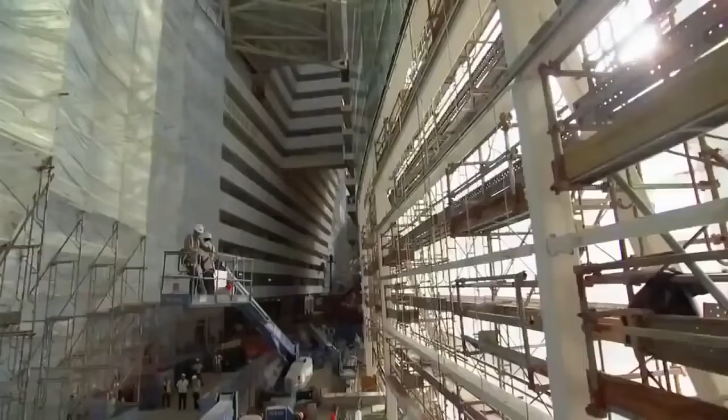Incredible feats of architecture. And right now, I'm going to take you behind the scenes of one of the largest construction projects in all of Asia. Singapore is reinventing itself. This small island nation is attempting to finish one of the most audacious buildings on the planet. It's the country's first casino, 3 skyscrapers covering 9 million square feet, and topped off by an engineering masterpiece, the first ever Skypark. Longer than 3 football fields, with gardens, swimming pools, and restaurants, all higher than the Seattle

Space Needle. We're actually in the pool right now. We're in the pool. This is the view from the pool. Wow. It's pretty spectacular. That is amazing. To finish it, crews must perform some of the highest and heaviest lifts ever attempted. I mean, you're putting a piece of steelwork the size of an aircraft carrier on top of 3 towers.

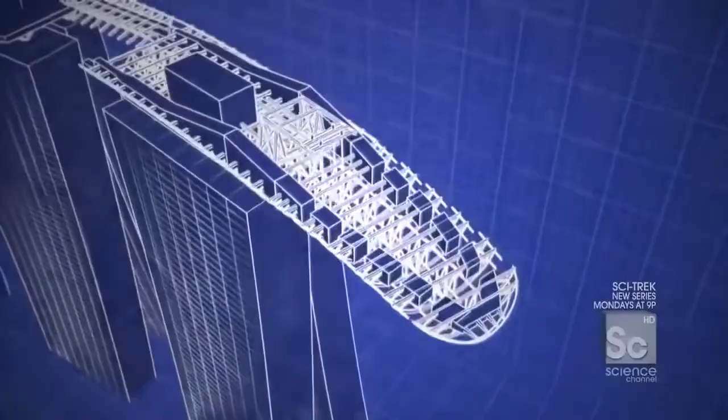Tackle one of the largest paint jobs on the planet. You would never do this in America. And erect one of the longest cantilevers in the world. 200 feet out over nothing. Oh my God, that's enormous.

I am in Singapore, a tiny island nation with less than 5 million residents. In fact, the entire country is smaller than all of New York City. Located at the southern tip of the Malay Peninsula in Southeast Asia, the main island of Singapore is both a city and a country, one of the most densely populated in the world.

Culturally speaking, it's a somewhat strict and buttoned-up environment. Chewing gum, against the law. Insensitive behavior is punishable by fine. And if you're caught vandalizing a building, you quite literally get hit with a stick. But despite this conservative cultural backdrop, Singapore is attempting to reinvent its image by doing something totally surprising. They're going to open a massive casino.

With no natural resources of its own, Singapore is risking $5.5 billion in hopes of cashing in on the gambling boom exploding across Asia. It's a pretty significant gamble because for Singapore, you've never had gaming before at this scale. You've never had a resort at this scale. Yes. You're taking a kind of a major leap. Yes, it's certainly a transformational project for Singapore. Where you hope to actually not just double, but triple the tourism receipts. That's big.

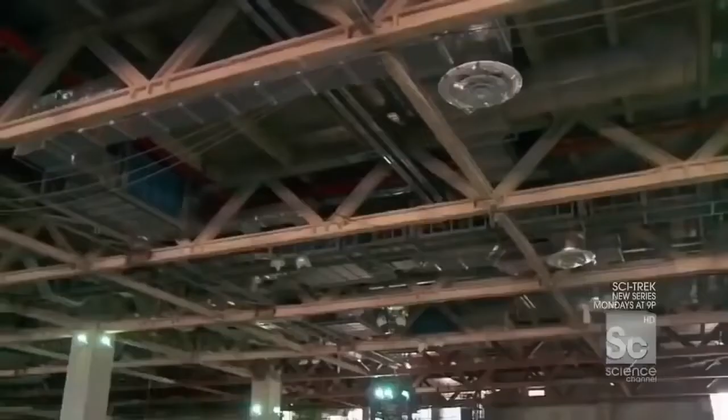The centerpiece of this giant transformation, the Marina Bay Sands. One of the biggest and most expensive casino complexes in the world. Unlike any hotel and casino ever built. Rather than just being kind of a traditional hotel and casino that we might find in Vegas, instead, we have a museum, you have theaters, you have retail, you have a casino, massive convention center, 3 incredible hotels, and all of that capped by the first ever Skypark. That is absolutely right. The Skypark on the very top will become the icon of Singapore, we think.

In a move that has never been done before, world-famous architect Moshe Safdie put a park across the top of 3 massive skyscrapers. An 1,100-foot-long urban oasis with tropical gardens and one of the longest swimming pools on Earth. All of it perched 55 stories above the ground.

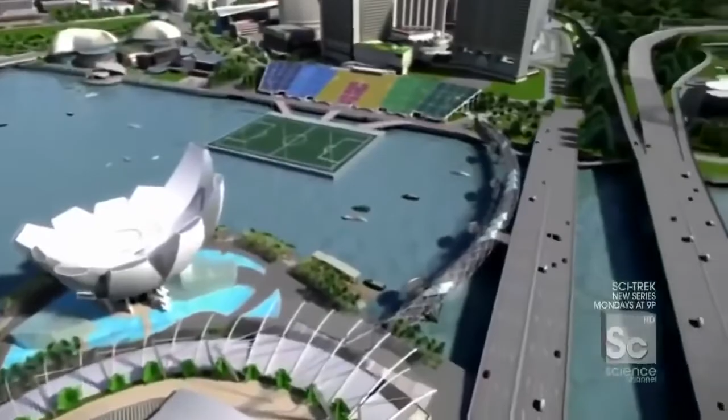So, Brendan, how do you describe a Skypark to people? I mean, it's just a fantastic structure. I've never seen anything like it. There's 3 55-story towers, and you're putting a piece of steelwork the size of an aircraft carrier on top of it. So it's quite a feat. And there's a park up there. There is. Well, there's more than that. There's observation decks and swimming pools and restaurants and all sorts of things. So it'll be a little city in itself.

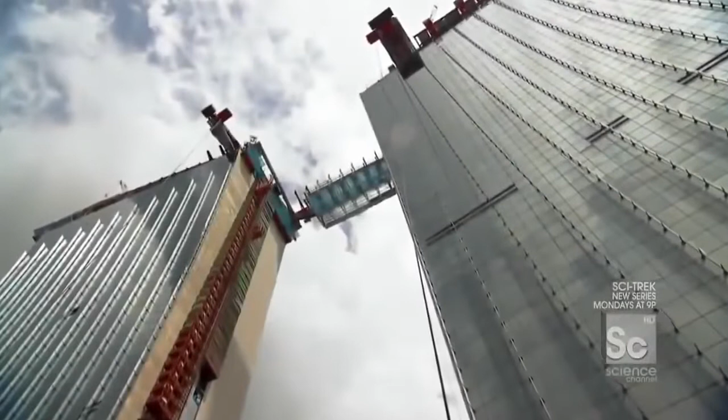The biggest challenge for builders, lifting 7,000 tons of steel, which is more than the main span of the Brooklyn Bridge, on top of 3 650-foot-tall buildings. To get it up there, the team divided the structure into 14 large but more manageable segments. 6 form the bridges connecting the towers, and the other 8 make up the observation deck, which sticks out 218 feet from the end. And right now, crews are about to lift the second-to-last bridge segment, a massive 350-ton piece that will hang between towers 2 and 3.

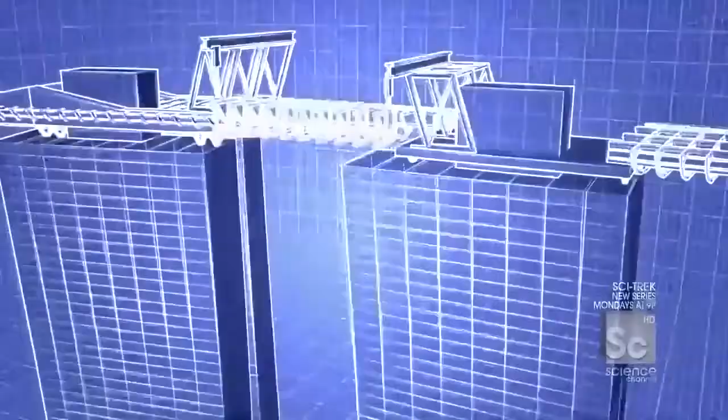It's a little after 7 p.m., and on most job sites, it'd be quitting time, right? Folks would be going home. But here in Singapore, we're about to begin one of the most critical lifts in the entire project. That bridge segment right there, an over 350-ton chunk of steel, is about to get lifted up over 650 feet in the air.

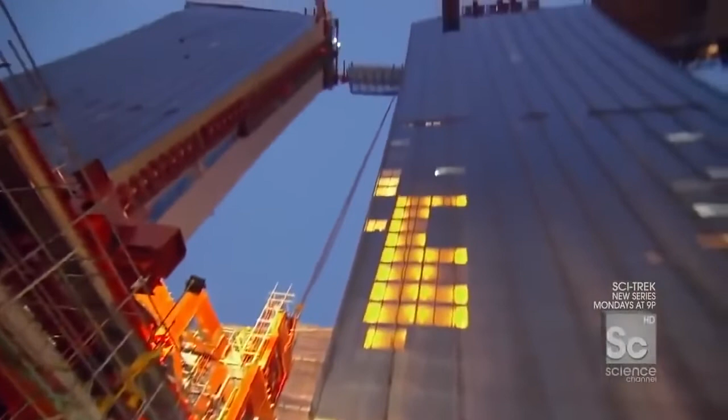I mean, in principle, this sounds crazy, right? Yes. We're actually taking a bridge, lifting it up, and putting it on top of 2 skyscrapers. This has never been done. Never done. So you've got to be a little bit nervous to get this thing up. Oh, definitely. We have to get it right.

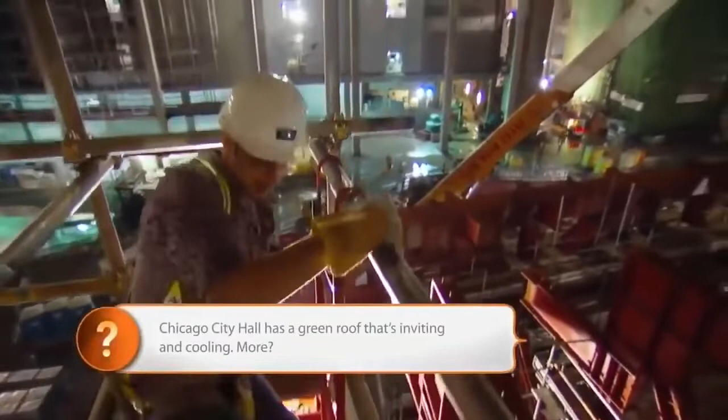Lifting this piece will take some of the strongest hoisting cables ever designed. Going up? All right, Solomon, up here? Yep. They get attached to the very top of the segment, 5 stories up. And now, at long last, I'm on the top of the whole bridge segment, and you really get a sense of its length, because look at that. It spans all the way out between 2 full towers, over 150 feet long.

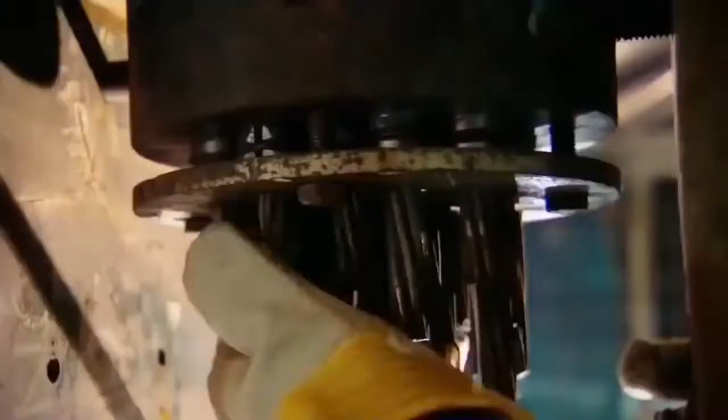And here, this is what it's all about. This is the shackle coming down from over 600 feet up. And to really get that point, come here, check this out. Look at the amount of bound cables inside of this thing. Just the density. It's 2 of these shackles, one on this side, one on that side. We're gonna lift up over 350 tons of steel.

All right, you call the man upstairs? An operator from the top of the Skypark lowers the shackle down. There she comes, here it is. Okay, 960 mm. It has to line up within 1/10 of an inch for this 150-pound anchor pin to fit through. Oh no. Stuck. Push. Come on, shake it a little bit. Hammer! Give it to me. You ready? Here I come.

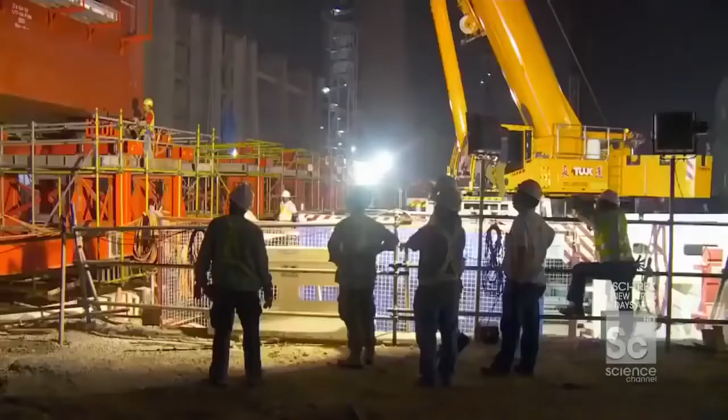Once the pins are pounded into place and the shackles are connected, there is one final step to make sure that the load is secure. Woo! Overnight, crews test the connections for 12 hours by hanging this segment just 4 inches above the support. If everything looks good, it is ready to go up. Okay, Solomon, she's floating. Yes. 4 inches off the ground. Ready for the lift? Yes.

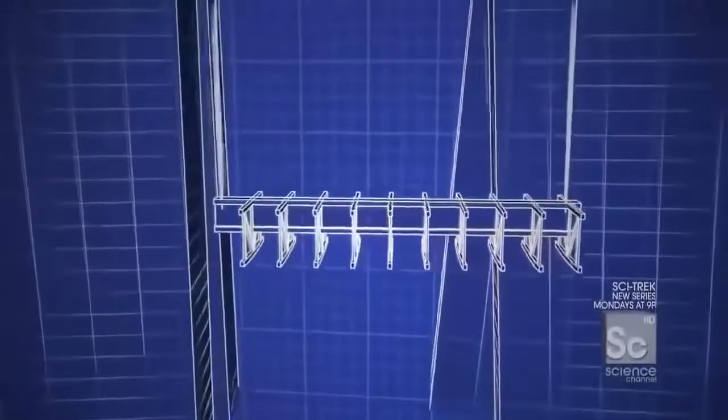How's the wind? If you can see it, it is swinging. And if it swings, it might hit the building. So when the lift begins, the concern is in a strong wind, like a pendulum, it could move and actually hit the building. Yes. It's that close to the building? It is very close to the building. Because of the curvature of the towers, this piece must pass within 10 feet of 2 glass skyscrapers on its way up. Any wind over 5 miles per hour is enough to call off the lift. So are we good? Are we ready? Yeah, good. So it's now okay to go.

Typically, crews would use tower cranes for heavy lifts, but this segment far exceeds their capacity. So instead, engineers are borrowing the technology from a different kind of construction, bridge building. Even the most powerful tower crane can lift about 20 tons. This thing weighs over 360, not an option. So they went with something called a strand jack. And to understand how it works, imagine 2 hands or clamps holding a rope. One hand locks the rope, the other brings the rope up, grabs the rope, goes back for more, brings up more rope, and so on and so forth.

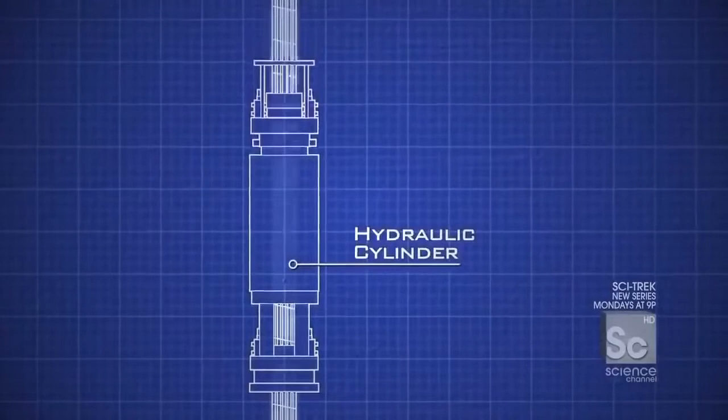Strand jacks work on simple hydraulics. A bundle of 22 half-inch diameter cables passes through 2 clamps. The top clamp grips the strands and moves up almost 2 feet. Then, the bottom clamp locks the cables in place while the top moves back down for the next pull-up. It takes 2 enormous strand jacks to lift this segment, one on each tower. Combined, they could lift the Statue of Liberty. It's the first time that this technology has been used to make lifts this heavy from the top of a skyscraper.

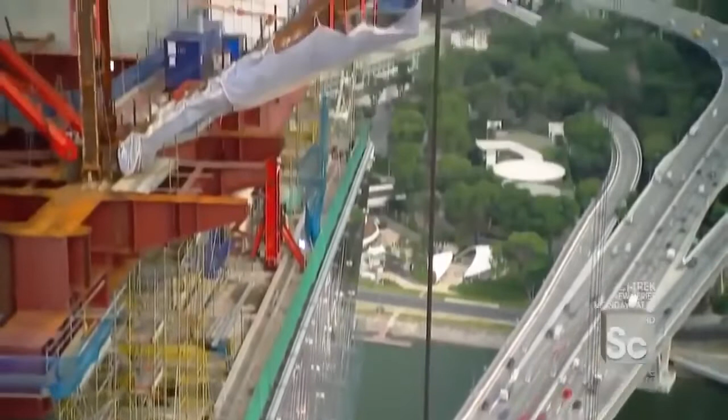Tony? Danny. Welcome, Danny. Good to meet you. Good to meet you.

Tony, where am I standing right now? Well, you're on the Skypark. So this is kind of where the action is. This is where the pool is. Yep. Right where we are now is the second swimming pool. We're actually in the pool right now. This is the view from the pool. Oh my God. People will be able to swim out to the edge of the pool. And literally there'll be no edge, right? It'll be an infinity edge looking out over Singapore. Wow. It's pretty spectacular. That is amazing.

And what's making all of this happen is this really nasty looking beam. That's right. So this enormous frame is supporting the strand jacking units. Now, can we actually head up top to the strand jack? Yeah, we can. Let's go this way. The strand jack sits on a temporary support structure that extends 30 feet out from the side of the tower. So, Tony, where we're walking right now, we're actually leaving the skyscraper below us and now heading out. We've just walked off the edge of the building.

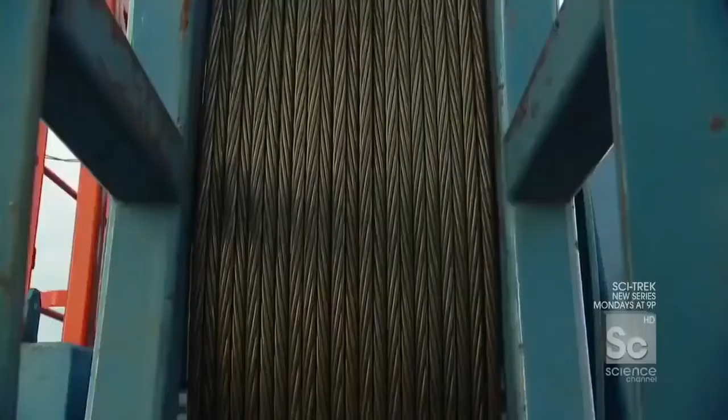Beyond. So we're now standing perched out. There's no more skyscraper below us right now. There's no building below us. It's awkward. It takes almost 30,000 feet of cables to raise the segment, enough to cross the width of Manhattan. And if any of them get tangled, workers cannot lower the piece back down. So one of the most critical jobs on the site falls to the cable manning crew here at the highest

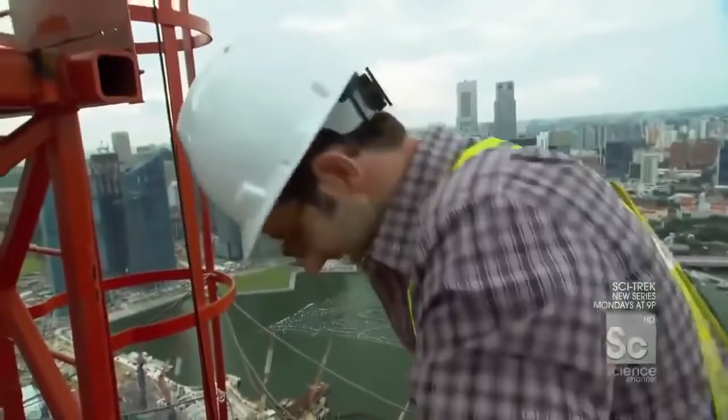point of the Skypark. Okay, so I am now standing at the very top of the Strand Jack. And you know that because right here, this is it. This is the top of the cables. And what we're about to do, every 30 strokes, they stop everything, clamp the lift, and spray some lubricant inside to make sure everything moves real freely. Unfortunately, I'm getting tasked with that role right now, so what do you got, some WD-40 we're doing this with? Look at this guy. Why is this the most low-tech thing in the world?

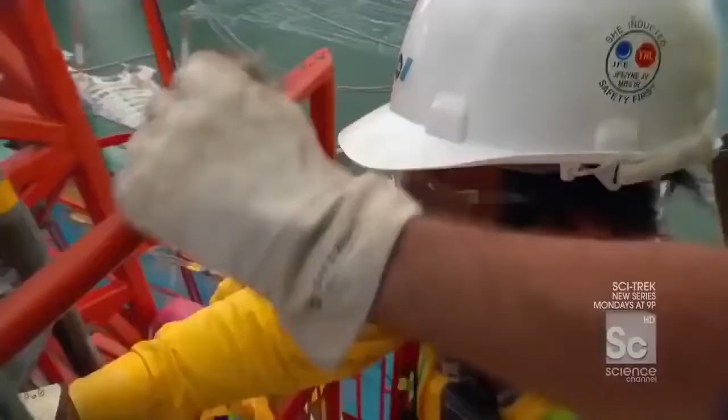Okay, so now what we've done is we've taken the collar off, we've lowered the jack down, now we've exposed the cables to give us good access for some good greasing. Okay, Romley, how do you grease it up? Put in, spray, pull out. Go in, spray, pull out. You know, it's sort of humbling to have to climb up to this point, to have that behind you, to have to take a spray can like this, stick in, spray, pull out.

These guys have to grease these cables once every hour for the entire night to get this segment up the final 500 feet to the very top of the Skypark.

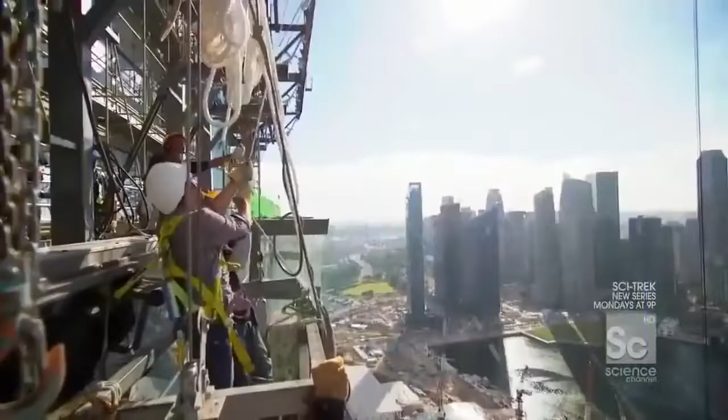Coming up, a one-of-a-kind solution to fight Singapore's intense sun puts up a fight of its own. Hang on. Whoa. Doug, can I pull you right outside of the basket?

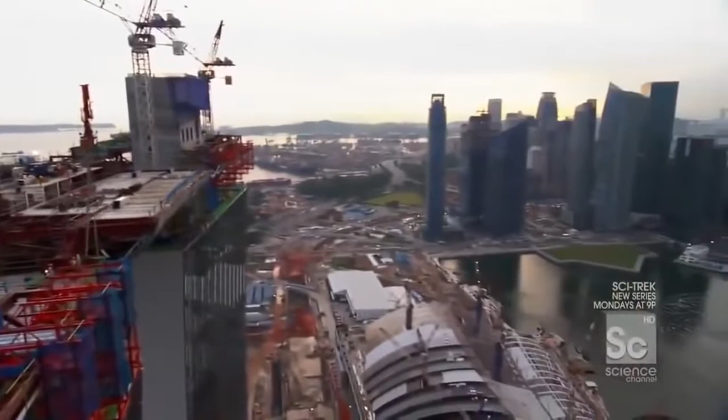Singapore is just 14 miles long. And with literally nowhere else to expand, this tiny island is increasing its footprint by actually filling in the sea, creating almost 1,000 acres of land on which to build an entirely new downtown. So tell me something. If I was standing here 5 years ago, what would I have seen there? Well, 5 years ago, you wouldn't see the floating gallery, you wouldn't see the wheel, you wouldn't see Marina Bay Sands, neither would you see the financial center. So this is a radically different skyline in just 5 years' time.

Yes. Singapore's evolution involved 30 years of land reclamation, followed by 5 years of construction, all culminating with the Marina Bay Sands. So 5 years ago, this would have been called the old downtown of Singapore. Yeah. And now with the Marina Bay Sands completed, this becomes the new downtown. Yes, absolutely.

The Marina Bay Sands 3 hotel towers will offer guests phenomenal views of Singapore's new downtown. But they also had to be a stunning centerpiece for the city's redevelopment. So, to define their curved silhouette, the architect clad the tower facades with 1,900 glass fins, which also perform a key functional role for the building.

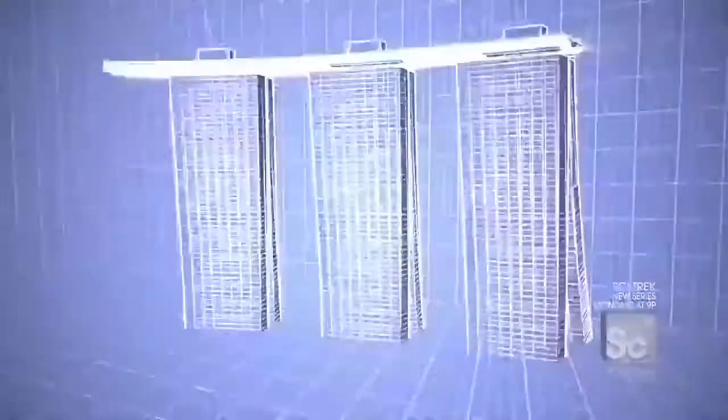The western face of the towers gets the most intense afternoon sun. So when the light hits the fins, they actually deflect the sun's rays, casting a shadow that reduces the heat on the hotel rooms by 20%, while still enabling clear views of the bay. But this distinctive design feature is also one of the most difficult to install.

I think today is going to be one of those days where I go and do something that I kind of think I shouldn't do, but in the name of really understanding how it is they build this building, we're going to do it anyway. I'm going to take you in a gondola up the side of a building, almost 600 feet, to install glass fins. And the guys who are going to help me do it are right here.

Terry? Hi, Danny. Good to see you. David, how are you? Danny, good. Not bad. What are we up to, fellas?

We're actually going up to the top. Basically, we're going to install the last fins to the Tower 1. And these fins are actually hanging perpendicular from the facade of the building. That's correct. Each fin is 10 feet tall and weighs 400 pounds. They're hung in straight vertical lines, protruding up to 4 feet from the side of the tower.

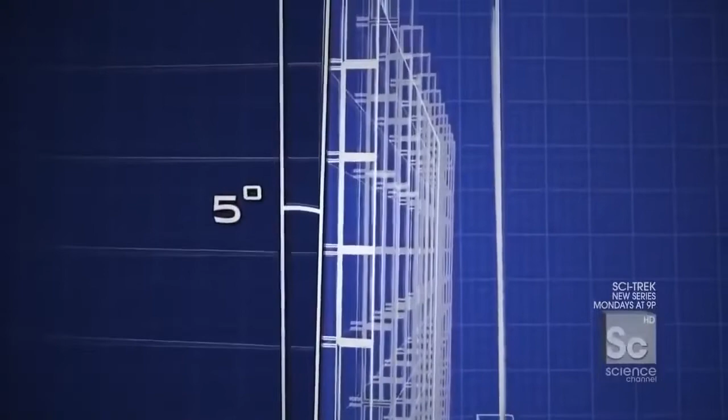Because the facade actually curves outward 5 degrees at the top, there would not be enough clearance for the Skypark lift to pass by. So 12 fins in the upper corners of each tower were left off until now. So this is it. We are closing up the curtain wall of Tower 1. Yes. Big milestone. Big milestone. All right. Take me over to my maker. Let's do this. Okay, no problem. Lead the way.

Terry's crew installed the fins from a 6-foot-long gondola hanging off the side of the building. You gotta be kidding me. It's basically the size of a bathtub, swinging from 2 sets of 650-foot-long cables tied to the tower.

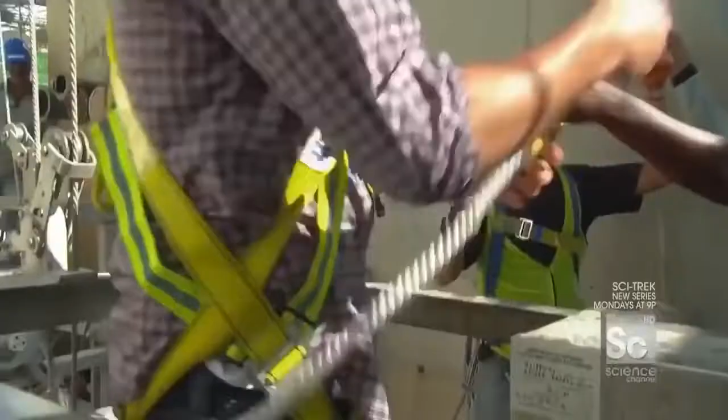Just gonna hang some glass for my boy Jay. 600 feet in the air. Right, man? Give me some skin. Buddy, we're gonna be great.

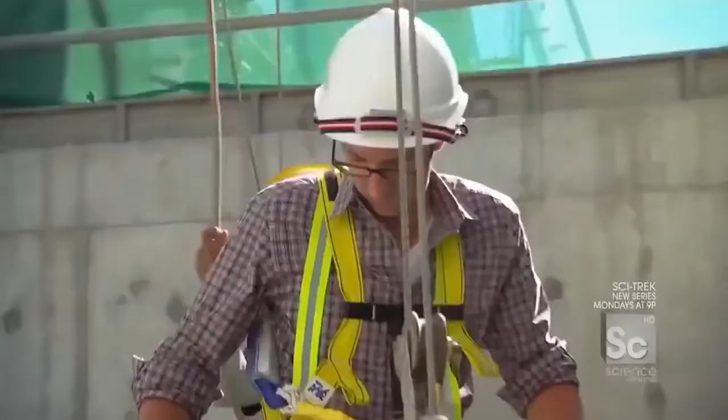Yeah, here we go. The gondola travels at just 0.2 miles per hour. Here I come, moving along, just moving along. So it'll take me more than a half hour to reach the top. Oh my God, this gondola looks like it was built by the Unabomber.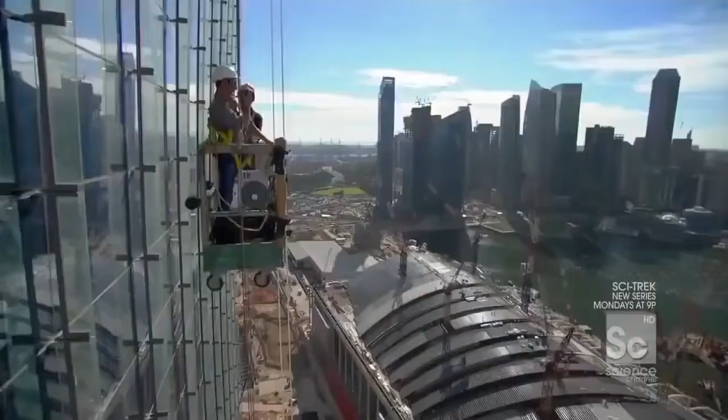Sometimes I don't really feel like I give you exactly what's going on for me right now, so I want to give you just a little taste of what I'm seeing. There is a fantastic view of Singapore. There is Jay, my chatty friend. And there is not a good situation.

All right, we're almost near the top, and you can tell because the building is beginning to bend back on itself and get closer to me. Right there, check it out, we're about 80 feet from the top of the building, and if you look up, you can actually see the missing glass panel.

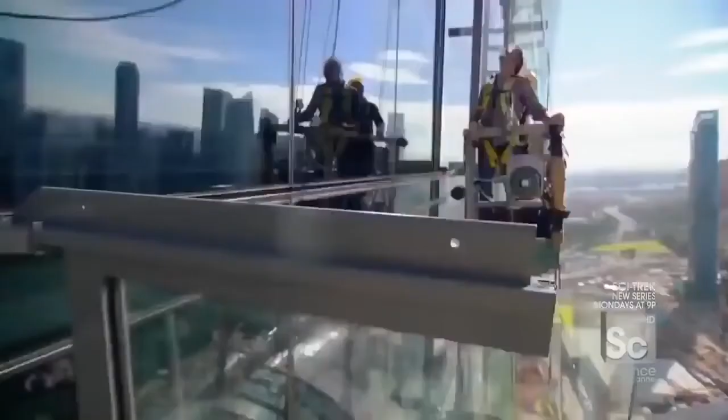And as I approach the top of the skyscraper, they're prepping the glass. There she is. Oh, the wind is really moving up here. That looks safe. Hey fellas! How are you? Nice weather, huh? Okay, this is something you don't see every day.

I'm outside a skyscraper, and right here, right now, I am touching the top of the building. We are on top of the skyscraper. All right, who's ready to install some fins? Each fin is a custom-built pane of solid glass.

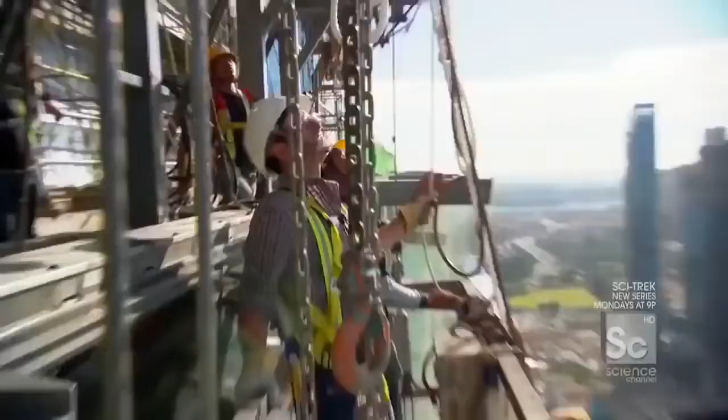I got the line, hang on. On a calm day, they are extremely difficult to manage. The wind is blowing this thing out. Give me a hand, give me a hand. But on a day with even a light wind, the task is almost impossible.

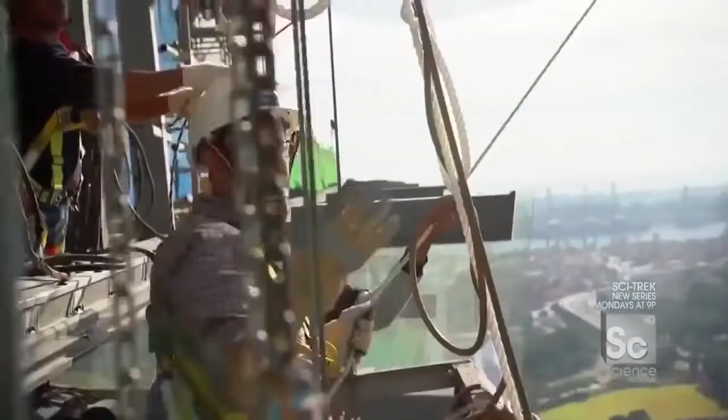Hang on, these gusts are gonna pull you right outside of the basket. Hang on, give me some help. But I'm not kidding, every time you get like a little gust of wind, I can feel my feet getting pulled a little bit. There she is, slowing down. It's basically like a big double laminated glass sail, and if the wind catches it, it moves.

Okay, let it come down a little bit more. The fin can swing up to 20 feet while attached to the tower crane. Coming this way, okay, watch out. Someone help him, someone help him. That's just too dangerous for the final installation.

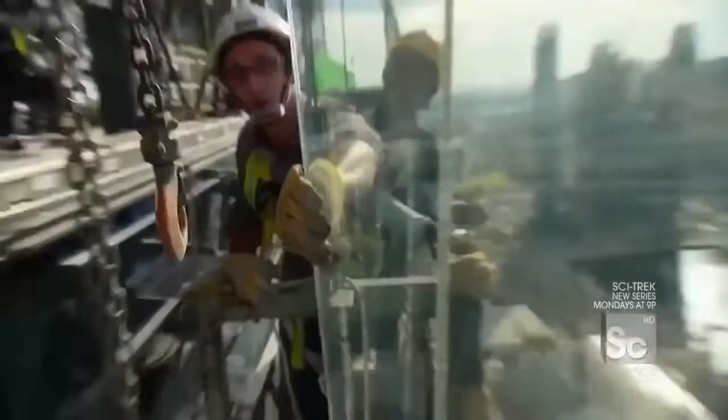So the team has to transfer it to a more precise chain block mid-air. Whoa, hold that side, please. All right, so this is it. What we're doing right now is essentially taking the load from the crane and transferring it to that chain block. Are we in? Okay, I think we're set.

This is another one of these moments in my life where I say to myself as an architect, did you really need the fins? Did you have to have fins? The building would have been fine, you know?

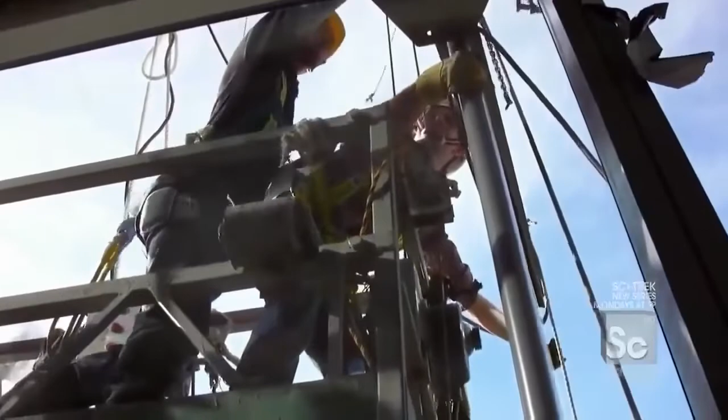Okay, gondola down. The fins are designed to clip into each other at the bottom. Lean down now, Jay. But here, at the very top connection on the highest fin, this is gonna be a nasty one, it gets locked to the building with bolts. Okay, Jay, 4 bolts.

Give me your thoughts. 1, 2, 3, 4. Are we good? Okay, are we good? Come here, bring it in. I need some, come on. Give me it, babe, I need some. There it is, okay, that's right. 4 bolts, locked in, lined up. We, Jay, are done. Can we go home?

Home, that much he understands. Let's get out of here.

Up next, building one of the longest and highest cantilevers in the world, jutting out more than 200 feet over nothing. Oh my God, that's enormous.

Singapore's new Skypark is the first of its kind: a steel structure longer than an aircraft carrier, on top of 3 skyscrapers taller than the Seattle Space Needle. On the northern end, the architect took this innovation one step further, creating the longest cantilevered observation deck in the world. It's the biggest and heaviest section of the Skypark, and it hangs out 200 feet over thin air.

When it's done, the Skypark is going to look to the eye like one 1,100-foot-long continuous element. But the reality is, it's actually made up of two very different structural conditions: bridges on one hand, and something called a cantilever on the other. Spanning between towers 1 and 2, and towers 2 and 3, are two bridges, basically acting like tabletops. The force goes from the bridge, transfers into the towers, and down something called shear walls into the foundation.

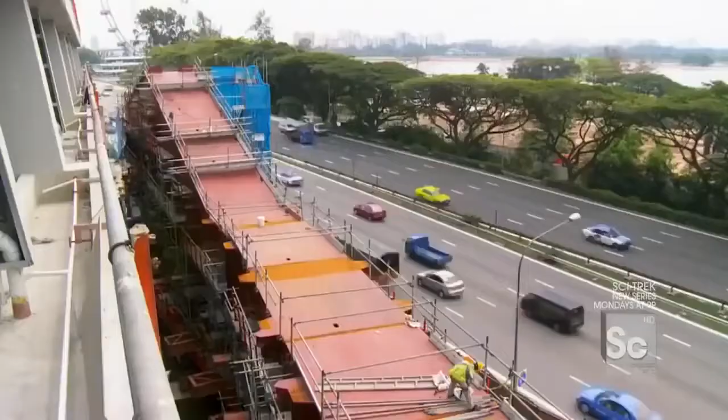The two backspans weigh as much as a fully loaded freight train. But that weight is critical to balancing out the cantilever, which will jut out longer than a 747 from the end of Tower 3. There are 860 tons of structural steel that make up the 218-foot-long enormous cantilever.

It is so big that they actually assemble the entire unit here on the ground before sending it all the way up there. The cantilever is just too big to be raised in one single lift. Instead, it's divided into 6 segments.

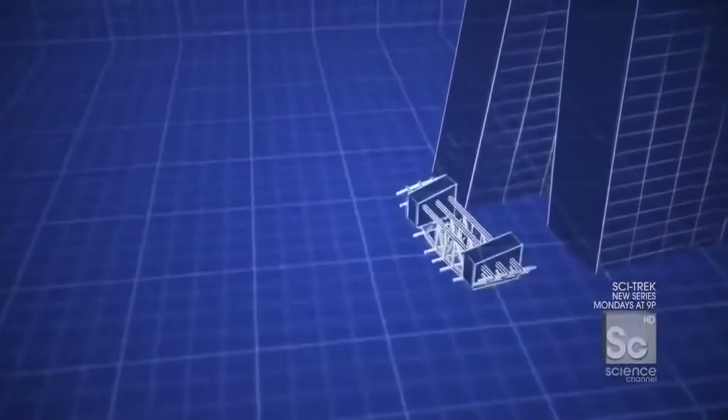Once they're 650 feet in the air, crews will have just one shot to fit them together. So before the segments can be lifted, they're assembled on the ground to be sure that each connection will fit perfectly.

So these pieces behind me represent the very final pieces of the cantilever to be assembled here on the ground. Once we get this and this bolted onto that massive cantilever, the lifts can begin.

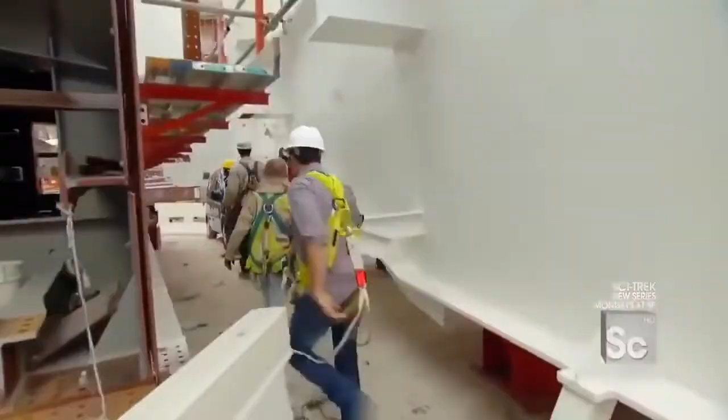The crane's now setting the shackles up. We're going to go on top of the piece to connect it. The piece we're attaching today is 12 feet tall, and it weighs 30 tons, as much as 2 Mack trucks. A crane will lift it over to the rest of the cantilever using 4 extra-large shackles.

So the shackles are now being tightened up. Shackle number 1, 2, 3, and 4 are all connected. The next step is to take the piece that I'm standing on, lift it up, and extend that cantilever another 50 feet.

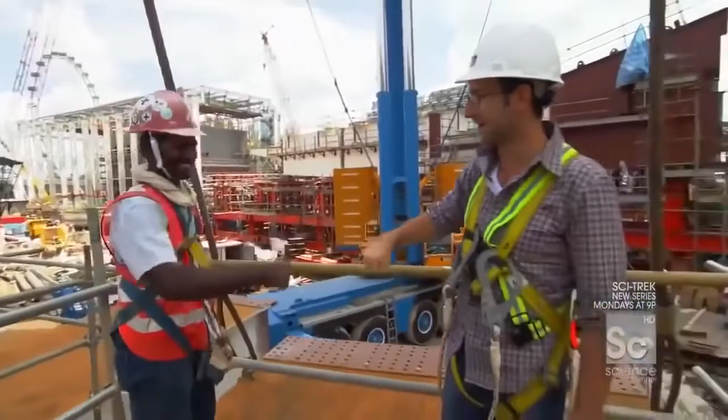You ready? Knuckles! All right. You ready, Knuckle Man? Knuckle Monster, you got it. Come over here for that. Bang! We are ready to go.

So what they've done is they've just put a bit of tension in the line, lift the piece just off the ground to make sure the shackles look nice, and they know where the center of gravity is. Are we good? Are we ready? Yeah, all right, let's go. She's off, out of our hands. Now the crane's got her. He's going to swing her all the way around this way.

What's really worth noting is as you look at this thing, this massive floating piece of steel, it's not but a small fraction of the entire cantilever that's going up there. Even with 1.5 million pounds of steel, this cantilever will still be susceptible to the problem facing all structures: movement.

All buildings, all bridges, even all cantilevers have a natural frequency, meaning they move ever so slightly. Now, if the movement of wind, or the movement of people even, starts to align with that building's movement, it can combine and collaborate and literally shake a building. So when the engineers were designing the cantilever, they had to be concerned with not just how many people stood on the edge, but also how they were moving.

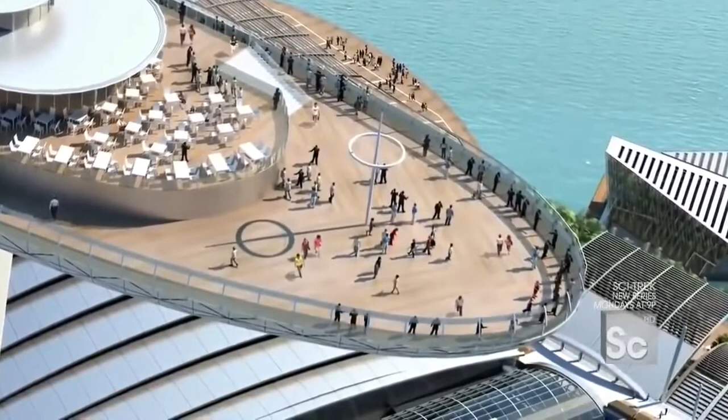This cantilever has been designed to withstand wind and earthquakes, but its most dangerous threat could come at the hands of a DJ. Yeah, it's thousands of tons of structure up there, so you and me jumping about, it's not going to do very much.

But if you get 100 or 200 people all jumping up and down at the same frequency, it can actually excite the cantilever and you start to feel it. It would take hundreds of people dancing to the exact same motion. Like the Macarena.

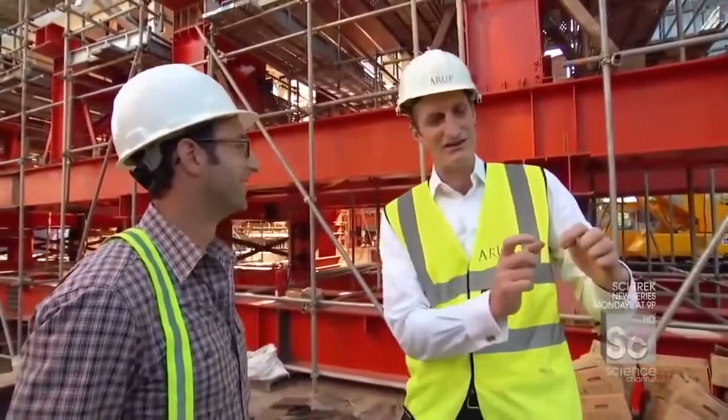Believe it or not, our dynamics engineers have iPods with thousands of songs loaded with their frequencies. So once you find out the frequency, in theory you can dance the Macarena, but not the bus stop. So some engineer is doing intense load calculations figuring out this thing can take the electric slide but not the achy breaky heart, and they know that in advance. Imagine the party going great, a big wedding, and someone puts on the Macarena and everyone's like, no!

Now that the piece has made its way over to the rest of the cantilever, the next major challenge is lining up this giant segment for attachment. The piece is now sitting right on top of my head. Imagine, on top of this incredible long piece of steel will soon be a garden, a pool, and a dance party.

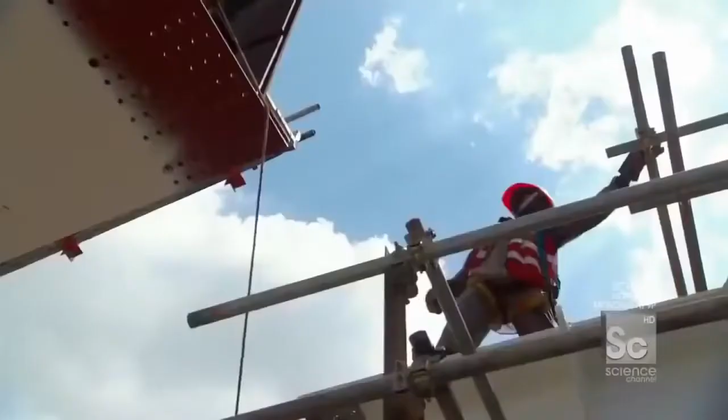Slowly got it down. Something incredible about lifts like these is that the first 99% happens almost instantly, and now it gets down to the details—pushing it, pulling it a matter of inches, to get all the holes lined up, get the bolts in, and take the load off the crane.

Once the piece is in place, the crews have to line up all 1,500 bolt holes. There are so many bolt holes. They'll connect about a third of them here on the ground to make sure everything fits together before liftoff, because there are no second chances once this piece is airborne.

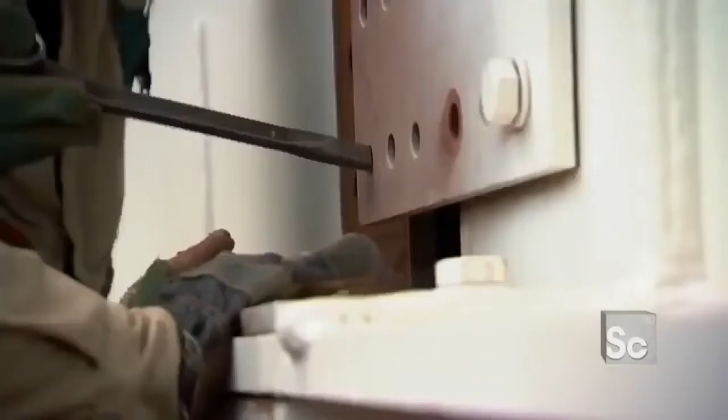This is how one piece fits into the next. You have these two plates on top sliding over the top of the previous cantilever piece. Here it comes, it's coming in. Once it's there, we'll put this pin in to lock the piece together so we can release the crane and move on—about 2 inches. Just about there.

The pin secures this new piece to the rest of the cantilever, so bolting can begin.

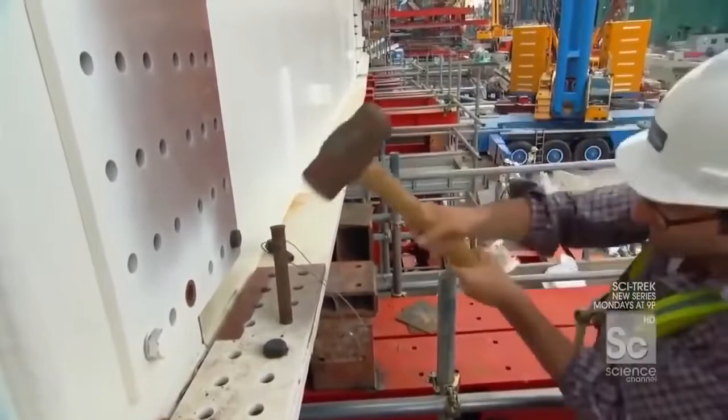Man, I never do that. Usually I break a finger and knock some steel off the thing, almost break the hammer most of the time. I knocked the crap out of that thing.

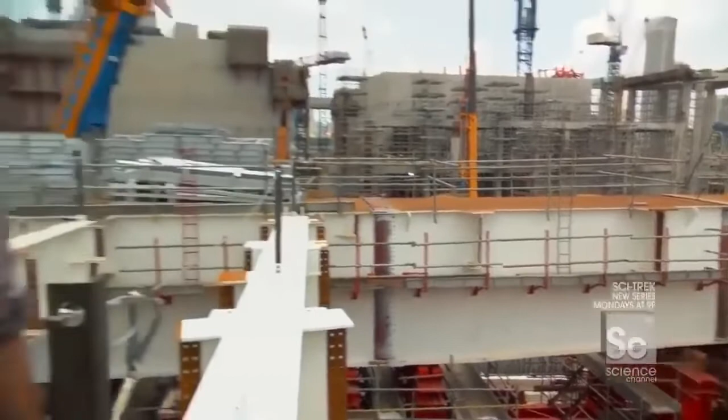Well, as you can see, the piece is in its final location. And now from where I'm standing, I think you can really get what this thing is: an 860-ton, 218-foot-long steel diving board that's going to be perched out over 600 feet in the air.

And coming up, a hotel like no other, with a lobby bigger than a cruise ship wrapped in glass. This is probably one of the most spectacular corridors I've ever seen.

But first, what is the maximum number of people the Skypark can safely hold at one time? The answer after the break.

The answer to the trivia question: 3,900 people can safely be on top of the Skypark, but only 900 of them can be on the cantilever.

Singapore is the gateway to Southeast Asia, and for the past century its economy has depended on its location as one of the world's busiest shipping ports. But this city is in the midst of a makeover. When the Marina Bay Sands opens later this year, Singapore will instantly become one of the largest gaming markets in the world, putting it in the same league as Las Vegas, Atlantic City, and Macau.

When Macau opened their casinos, they looked to the past for inspiration—you have the Venetian in Las Vegas, you have the Venetian in Macau, a carbon copy, only bigger. But here in Singapore, a country so focused on image, they didn't want to mimic what came before them, but instead are trying to literally reinvent the idea of a hotel casino.

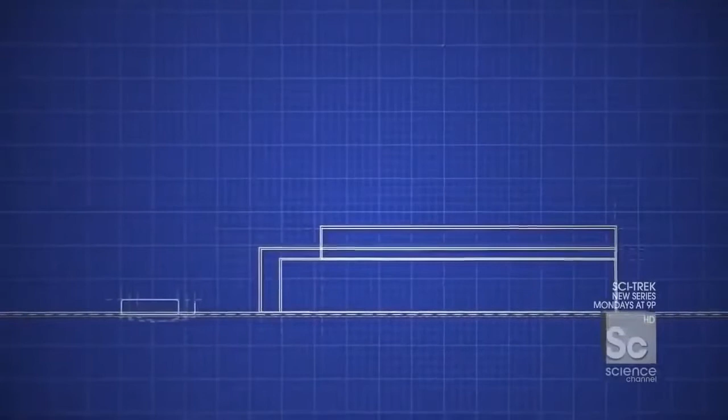The difference comes down to design. The typical casino model involves a giant gaming floor with a flashy attraction out front and a hotel connected in the back. But with the Marina Bay Sands, the architect separated the hotel from the casino and relocated the attraction on top in the form of a Skypark.

From my perspective, when I think of a hotel and a casino, I think of a ginormous casino, a tall hotel in the back, and basically not being able to check in and go to my room without passing a blackjack table or a slot machine. This doesn't follow that model. It does not. Singapore has a very particular vision as to how they want the gaming component to work. What we built here was not something that was casino focused. It was all of this. So the casino is part of something far grander. And key to making that happen is not just building a set of normal, typical expected structures, but instead to do something like that. Correct.

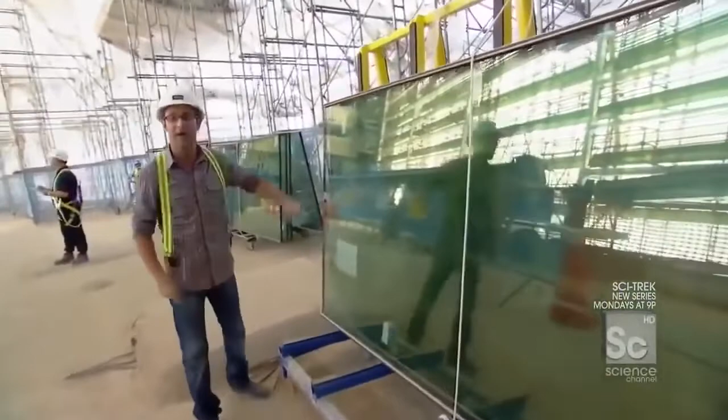This revolutionary design carries over to the hotel towers themselves. To create a hotel lobby like nothing before, the architect actually split each building apart for the bottom floors, creating one long tapered space linking the three separate towers together. The 3 hotel towers are all connected by one long continuous atrium. And that atrium is covered in glass. These massive 9-foot-long panels that we're about to take from down here and install right up there. 3,500 individual panels will hang throughout the atrium, transforming this space into one 850-foot-long tube of daylight.

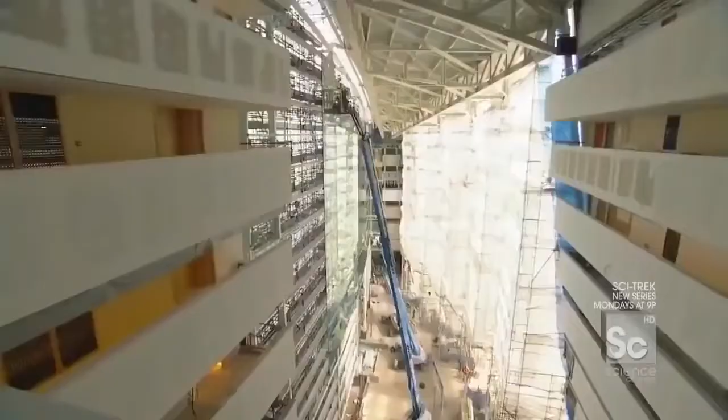So Terry, once the scaffolding comes down behind that glass, this whole chamber is going to be just awash in light. Yes, that's correct. And these spaces literally link all 3 hotel towers and let you look from one end of the building all the way down to the far end. That's correct. So this is more than just a kind of connective hallway from one hotel to the next. It's not just a corridor. This is not a corridor. No. And if it is, it's probably one of the most spectacular corridors I've ever seen. Correct. The atrium glass is a key part of the tower design, but it also plays an important functional role in sealing up the building.

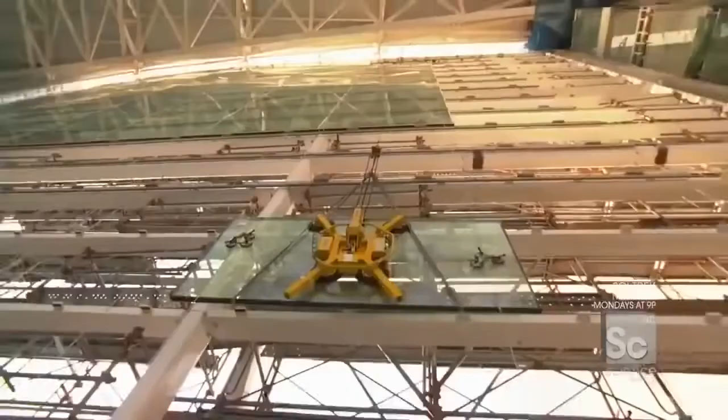With hotel guests arriving in just 6 months, the delicate job of hanging all that glass needs to happen quickly. Now, why is it so important to get the glass on the atrium and button up the facade? The vital bit is we actually have to make the building watertight as quickly as possible to enable all the final finishes to commence on the inside. So all the sheetrocking, carpeting, wallpaper, painting, that sort of stuff can't happen if moisture can still penetrate the building. That's correct, yes. So today we're going to be headed, where, up there? We're going up to the top and we'll be installing the top piece of the glass. So we have a big task ahead of us. To finish the atrium on schedule, Terry's team has to install 200 panels a day, about 5 every half hour. So here the guys are, they're just getting the glass ready.

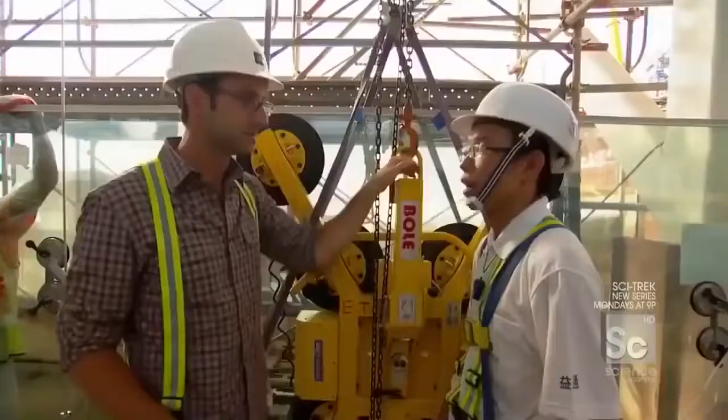A task requiring 8 international teams of glazing specialists. Hello, sir. I'm Danny. I'm Mike. Why? Nice to meet you. Nice to meet you. So Why, you're one of the installers? Yes. And you've been installing glass how long? My experience is over 10 years. Your experience is over 10 years. Yeah. My experience is almost 10 minutes. 10 minutes? So this is going to be a very good team. You and me together. Master and apprentice. Are you ready? Yeah, I am ready. Let's do this. Let's hang some glass.

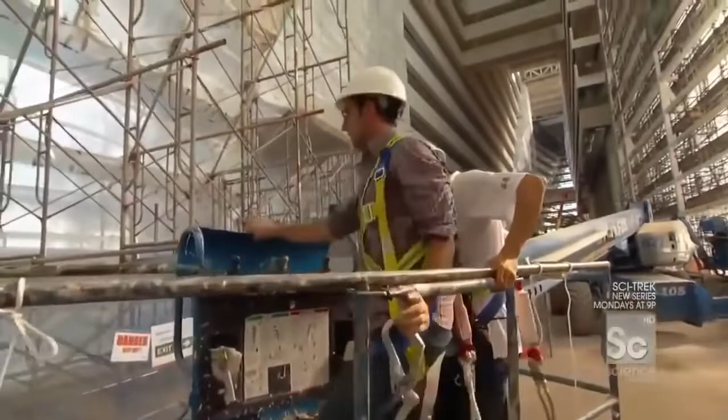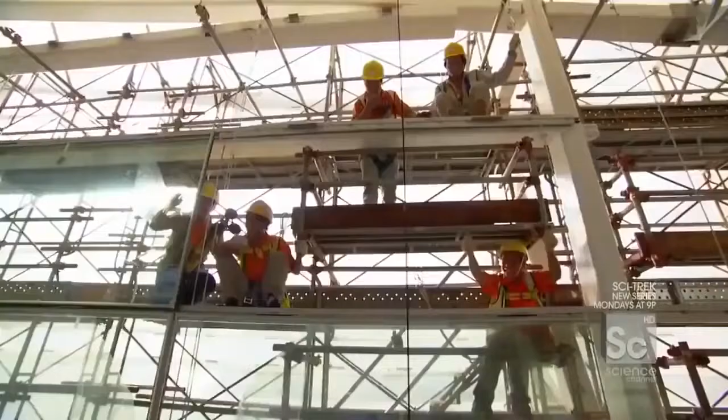Let's do it, Why. We're installing the 3rd highest panel in this section of the atrium, more than 100 feet from the ground. Safety harness? I want you to be safe the whole time. In addition to Why and me, it'll take 10 other workers to install this 550-pound panel. The crew on the ground applies suction cups to the glass and then sends it up on electric hoists to meet the crew in the air. Here it comes. Check it out. And waiting for me. Hello, my brothers! You guys ready to rock and roll with myself and Why? The big team. This is the Singapore Glass Stallions. All right, here it comes.

It's a big piece of glass, huh? Why, what are we doing? What's the first step? The first step is we need to take off the handle. So I'll take off that side, you take off that side? Yeah, take off only the handle. Turn only. All right, I don't want to drop it though.

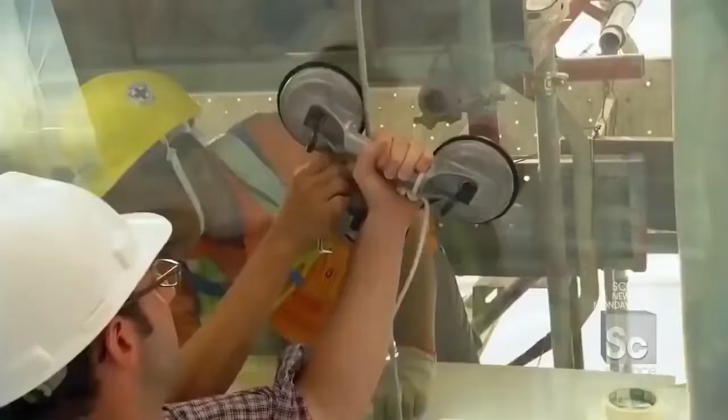Don't want to drop it. Okay. The panel is supported by a backup system of smaller suction cups to help guide the piece on its way. Okay? Oh, okay. Yeah, okay, guys. It's okay. Yeah. Let go? No, it's too scary. I'm not going to do it.

Okay, I did it. 好，坐上去啊。 And just like the glass fins outside of the towers, we'll finish maneuvering this panel into place with the chain block. Yeah, okay, guys. Okay, so the chain block has lifted the glass panel to just about the height, as you can see, of the previous panel. So the next step is to push it in and get it locked into place on the brackets.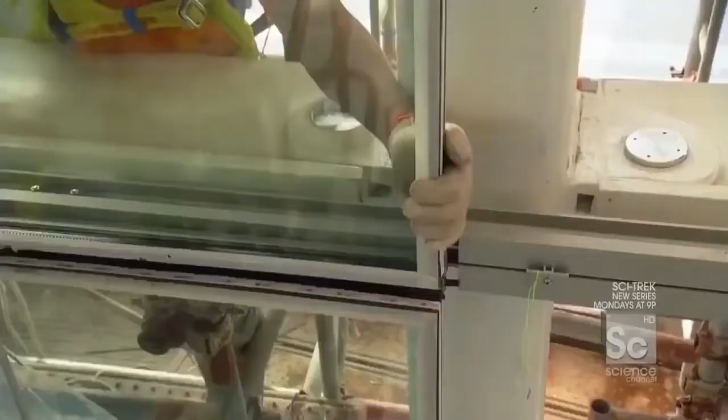Okay, why? Should we bring her in? Yeah. Last one. The interior work for the hotel cannot get started until all the atrium glass is hung and the lobby is watertight. I'm pushing, why? So to speed up that process, 20 attachment brackets come pre-installed on the atrium wall frame. They sit horizontally so the glass can slide into place. There we go. And then we'll turn them vertically to lock the panel to the building.

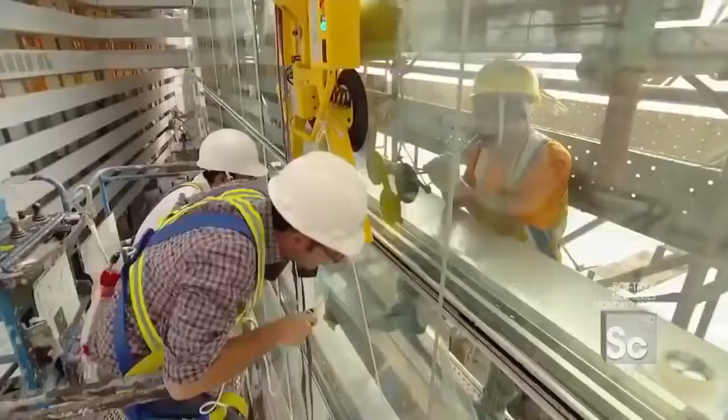Do I need the screwdriver? No, you use the power tools. I'm old school, why? Power tools. I'm old school. You make sure all the pressure bars must be tight because the hand power is not standard. You haven't seen my hand power, why? Hand power. Tight, yo. Check it, why? If you don't trust me, check it. You have a look. That's just good stuff.

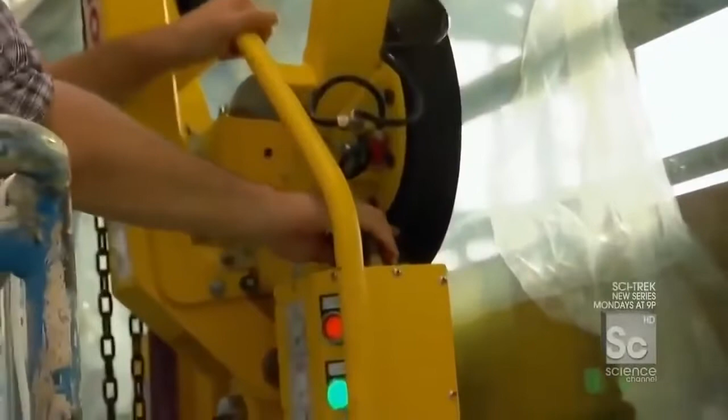Yeah, good. Very good. All right, so all 4 sides are locked into place, and this glass panel is now fully supported by the building. So therefore, why, I'm pulling the plug. Suction is coming off. 3, 2, 1. Okay. All right. Very nice. Yeah. Look at that. Nice, huh? Very nice.

Up next, racing to finish one of the largest paint jobs in the world. We're gonna use a brush. Yeah, brush. This brush. Yeah, this brush.

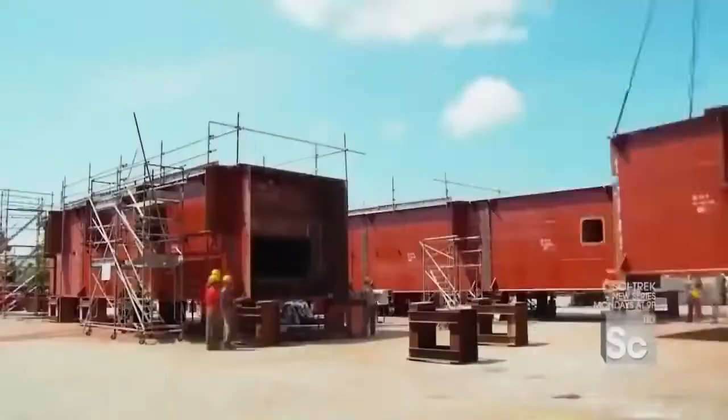After 30 years, Singapore's ambitious downtown redevelopment is nearly complete. Its crown jewel, the $5.5 billion Marina Bay Sands, is due to open in just 6 months. And crews are racing to complete the hotel's complex facade. The glass on the face of the towers is complete, but on the side walls, the concrete remains exposed. So to finish those walls on time, there's another massive job ahead.

When you clad the outside of a skyscraper, typically you cover it in maybe some stone veneer, maybe some glass, or maybe some metal paneling. What you don't do is you don't paint it, right? Because if you've ever painted a fence, every couple of years you have to repaint that fence. But here in Singapore, they're so focused on things being clean, so focused on the immaculate maintenance, they're willing to actually paint their buildings. So today, I'm going to do something that you would never see on an American construction site. I'm going to paint a skyscraper.

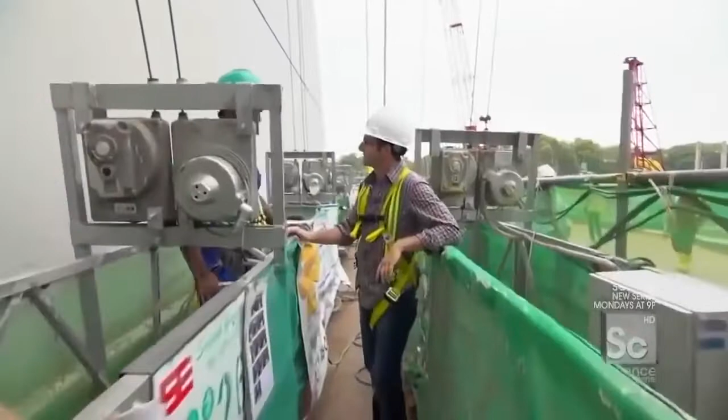Crews will have to paint an area about the size of Mount Rushmore. Muti, I'm Danny. This is going to be one of the single largest paint jobs ever attempted. Yeah, so I got a bucket of paint, and in order to apply the sophisticated skim coat with the technology, we're going to use a paintbrush. Really, Muti? Yeah, this brush. It's a small brush, yeah? Yeah, small brush. One small brush.

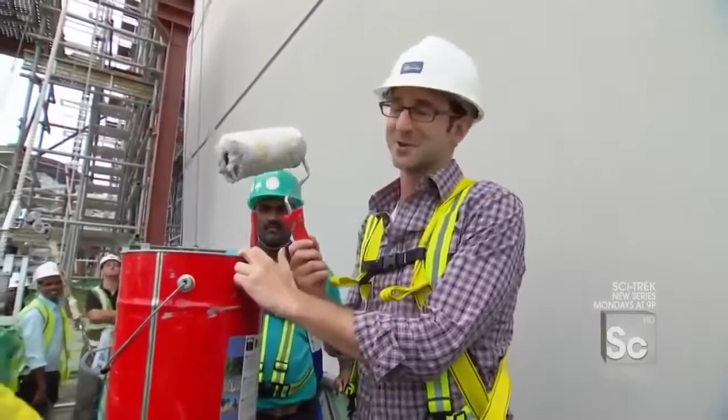Right, and obviously you couldn't do a skyscraper with that little brush. That'd be crazy. So instead, I have a roller, which ought to really expedite the process. Painting fast. All right, well, what more do you need? Muti, yeah, away we go. Okay. This wall faces the country's main highway, connecting the airport to downtown. So Muti, you're okay? Heights, no problem? No problem, no problem. And on opening day, with all eyes on Singapore, it's gotta look good.

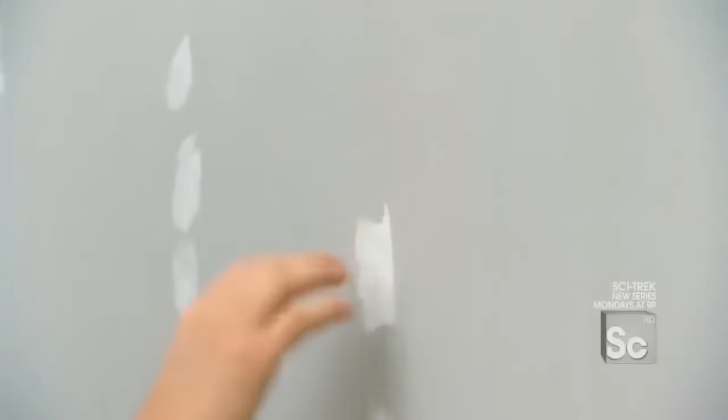Yeah, okay, so welcome to House Painting 101, Skyscraper Edition. So we're about 200 or so feet in the air. We've reached our cruising altitude in a super, super robust and technologically sophisticated gondola system. And what we have to do is fix this. This wall is a mess, right? Little holes they patched and filled. We have to have one smooth surface ready to be seen by all of Singapore.

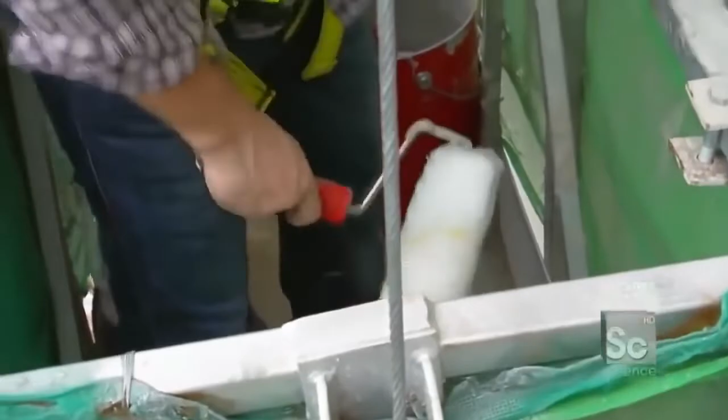Muti, start with the dark gray first, huh? Okay, first. I'm gonna paint within the lines here. The dark gray lines mark each floor of the tower, so you can still see the floor-to-floor separation from afar, giving a sense of scale to this massive surface. Okay, so now that the gray line has been deepened and darkened, we're gonna start painting the building.

So Muti, just go to it, huh? All right. Nice and gray. I like that Muti's looking over like I'm touching up the top of the Sistine Chapel or something. In total, Muti and the rest of the crew will use more than 2,200 gallons of paint to cover all the tower shear walls in time for opening day. Muti, how's it look? Does it look good? Yeah, very nice, very nice. Good. Muti's loving it.

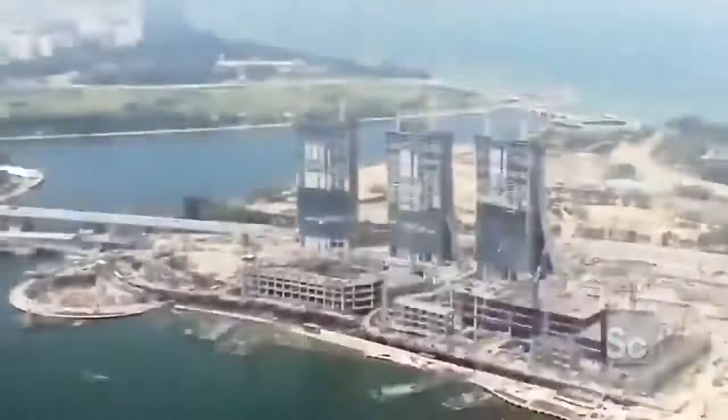And this project cannot afford delays, because every month the casino is not open, developers give up $100 million in lost revenue. So these crews have been running at top speed since day one. So, John, just to put this in perspective for someone who's not used to seeing a project this size, it would take perhaps another country, a project this big, this expensive, this complex, as much as 6+ years to build. Yep. And you guys are on target to complete this in 3 years, half the time.

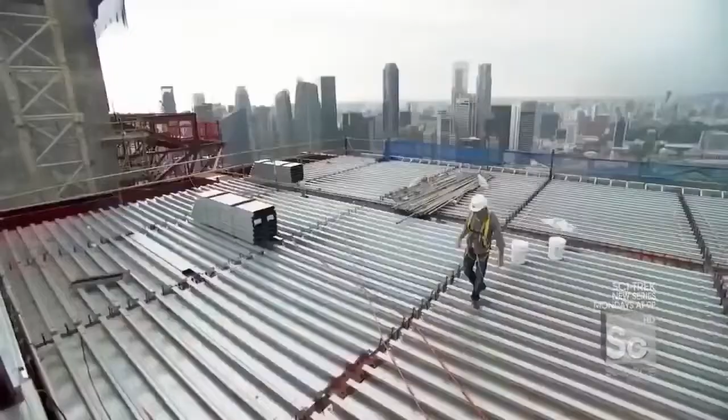Yeah. And one of the critical aspects of this project at the moment is getting that Skypark structure up. So getting the superstructure of that Skypark done is key to kind of closing up this project and finishing this race. But this is going to be a sprint to the finish, because crews up at the top of the Skypark have only 6 months left to turn this mess of steel into the world's longest elevated pool deck. This is it. This will be the pool deck, and that will be the pool.

But there's a problem. I mean, there's a pretty big problem. You go on vacation, you come to the Skypark, you see this amazing view of Singapore, and then you fall through a hole to your death. Not good. Not good fun on the vacation. So Wilson and I are going to cover it with this aluminum decking. Cover the holes? Let's cover the holes, my friend. We're filling in the bridge segments between towers 1 and 2, more than 650 feet up. And there is literally nothing below us but the decking we're about to lay.

Oh, I just got that thing. I just looked down and I saw a car and it was so little. And my body was like, wait a minute, what are you doing up there?

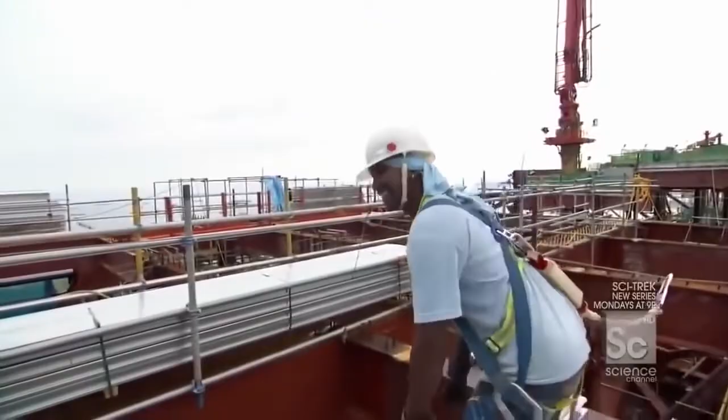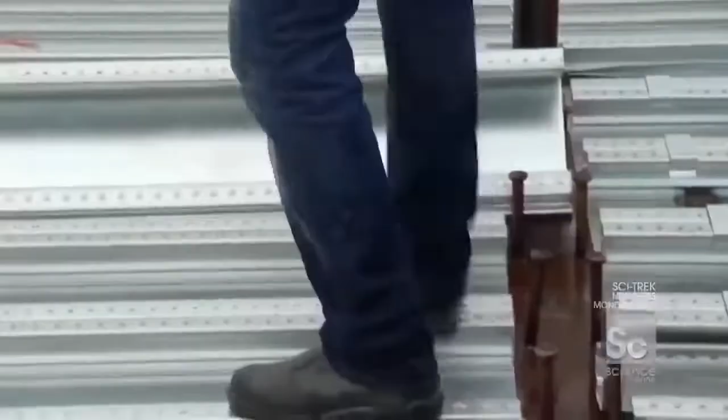All right, Wilson, how do we begin? Step 1? Yeah, step 1. Okay, you ready? 1, 2, 3. Okay. And stroke in. Pull back. Okay, good. Put the clip on. Nice. Wilson, next piece. Plugging up the hole. Dear God. Okay, letting go. Woo! With these 10 panels in place, another 125 square foot section of this Skypark deck is complete. Last piece. Wilson, victory! Wilson and the rest of the crew will have to lay down 300 panels a day in order to have the entire Skypark ready for opening day.

Wilson. When the Skypark is done, people will be swimming right there, dancing on that cantilever, having dinner in that restaurant. Yes. But we're not done yet, are we? Come back in 6 months, check out this Skypark. Me and Wilson will be having a cocktail and enjoying this ridiculous, incredible view.

You're buying though, right? Yeah, correct. All right, cool. Wilson's buying, so it's all good.

When the Skypark is complete and the Marina Bay Sands opens, Singapore will join the ranks of the world's top gaming destinations and fulfill a 3-decade-long quest to reinvent a nation. You know, for me, the moment when a building actually becomes a piece of architecture is when it transcends its function. So what I mean is, think of the Empire State Building. It's not just about the people who work inside of it, but it's really about the spirit of New York City.

The Marina Bay Sands is a project with a hotel and a convention center and a casino. But in reality, the sum is greater than the individual parts. This is a project where an architect, an engineer, an owner, and a government have all come together to literally try and reinvent the face of a nation. And I think if you come back here in about a year's time,